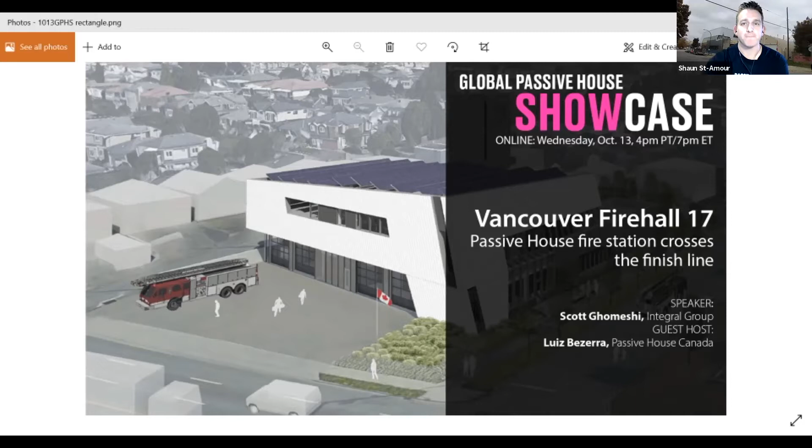For those of you who don't know me, my name is Luiz Bezerra. I'm the Manager of Education, Training, and Development with Passive House Canada. I'd like to thank the Passive House Accelerator for the invitation to be your guest host today. For those who may not know who Passive House Canada is, we're the Canadian affiliate of the Passive House Institute. Our focus is to broaden and include advocacy, education, and professional development through events and technical services. We have over 3,000 members nationwide, and we're one of the largest passive house training institutes all over the globe, with over 1,500 students in our programs just in 2021. And we now have over 200 students becoming certified passive house designers, consultants, and tradespeople. If you're interested in learning more about us, visit our website, passivehousecanada.com.

Before introducing our presenter today, I want to congratulate all of those involved here in the Vancouver Firehall number 17, and all of you here today. I wrote a few words here, guys. My English is my second language, but it's something that really touches me, and it's something I think about all the time: the changes we make today shape the future of our planet. So Harvey, that's for you, man. Let's not ask how much it costs. Let's ask how it's done. Will the decision help us moving forward and being able to save our planet? This group has the power, strength, and resilience to make necessary changes to shape a better future for our planet. This project shows, once again, anything can be achieved. And if there's will and effort, we'll get it done. Let's not reinvent the wheel. Let's make the wheel spin faster. There's a quote I like repeating to myself over and over when I'm working: alone you go faster, but together we go further.

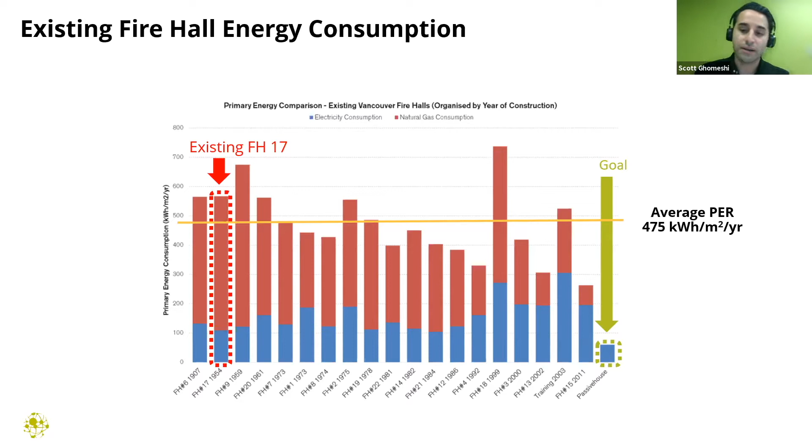With our fire hall, the existing fire hall at the time, a 1954 postmodern building, was probably one of the worst offenders, so to make the jump over into the passive house realm was practically an 80% cut. It's quite significant. We knew we had to do everything we could from the envelope perspective, and HCMA, I think, did a fantastic job of addressing that, particularly considering as tight a site as we did have to work with. But we knew that the systems and the approaches for heat recovery and system selection were going to play a large role in tying the energy narrative in and finding solutions that were going to be quite fitting for this project.

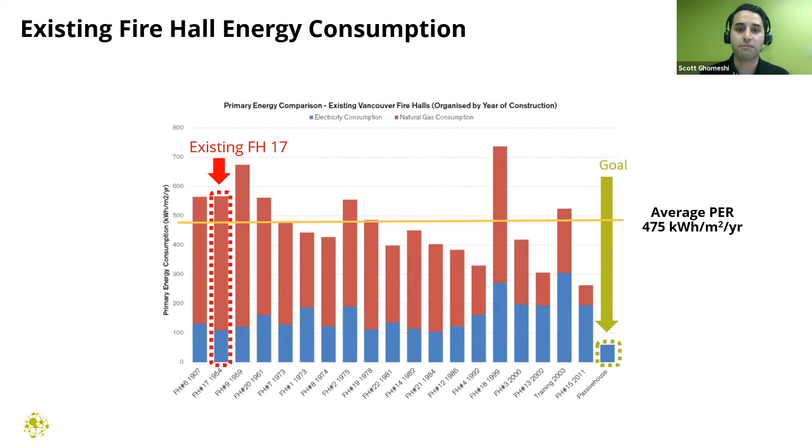The system selection started with very simple conversations with the fire department and the owners. They had some very specific requirements, which were that they needed active cooling all throughout the year, particularly because when firefighters return after a call, they're heat exhausted and need to be cooled. The spaces needed to remain cool. Average space temperatures of 20 to 25 degrees sometimes just wouldn't cut it, so they needed some spaces to be cooler than others.

Noise mitigation was also a big thing for them. I'll share a site shot on the next slide so everyone understands the context. For those who know this site well, it's off of Knight Street, a very busy thoroughfare with semi trucks rolling through at all times of day and night. Noise mitigation was key not only for firefighters to get rest, but also to be conscious of the noise the building generated for the neighbors, since the area was mostly residential, RS1, single family homes. So they had to be very conscious of that.

The city of Vancouver is probably one of the most leading edge municipalities in BC and North America, with a big emphasis on reducing carbon and pushing the envelope to reduce their own footprint. In doing so, they tasked us with looking at low carbon solutions, which right off the bat meant looking at natural gas free sources of heat, so electric based systems. These key requirements in the building essentially pointed us down the path of electric-based heating and cooling systems, which inherently lend themselves to heat pumps.

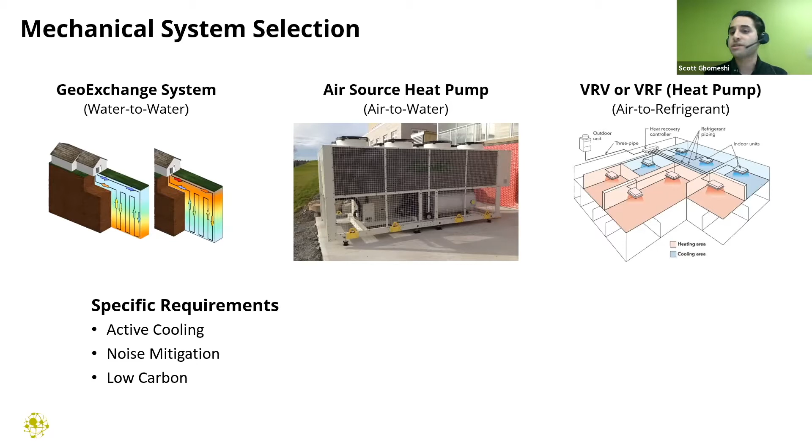Of course, you have water to water, air to water, and air to refrigerant systems. Going through the pros and cons of each of these, we eventually settled on geo-exchange, primarily for three key benefits that were looked at across the board.

For the city and particularly the stakeholders, they understood the superior energy savings that can be realized through geo-exchange. Touching on the system resiliency aspect, the big reason you have greater levels of resiliency and energy savings is because you're sharing and exchanging heat and cooling with the ground, which is a lot more constant and less disturbed compared to air to refrigerant or air to water systems, which rely on outdoor air temperatures.

It also has great noise mitigation opportunities because you no longer have big outdoor units blowing at all times of day, possibly causing a nuisance to neighbors. It also increases the service life of the equipment because everything's held indoors, nothing's being weathered over time. The maintenance people were particularly keen on that as well, since they didn't have to go up onto roofs to access equipment. Everything was indoors in a nice, thermally comfortable passive house for them to access.

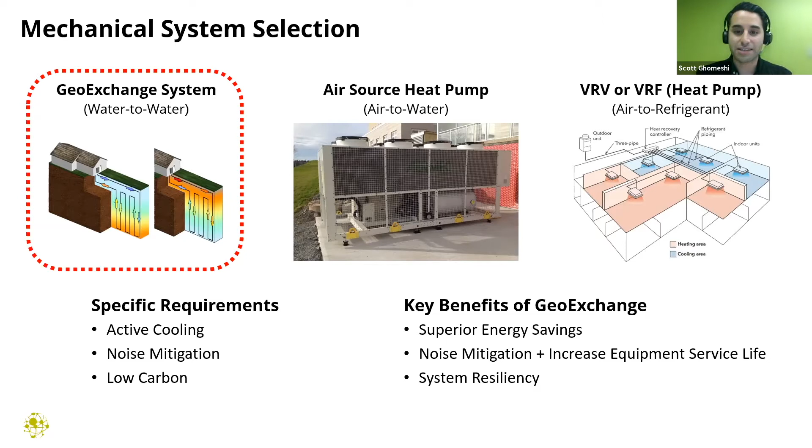A great thing about this project is the geo-exchange field required. When you consider a passive house and really reducing the loads for this building, which is just about 19,000 square feet, straddling the north and south lines of the property, with Knight Street on the diagonal on the left, we had a very narrow site to work with to actually install geo-exchange. Based on our modeling for the heating and cooling needs of this entire building throughout the year, all it took for us was just 9 boreholes.

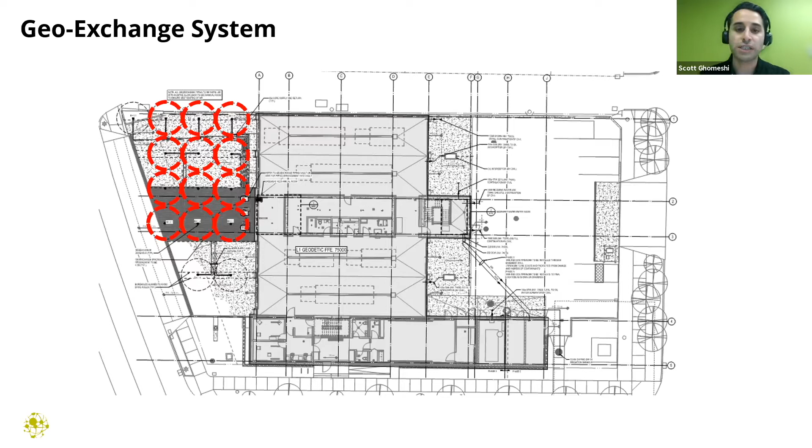And that right there is a great story. There's no backup heating in this building at all. No backup boilers, no backup cooling towers or anything. The geoexchange field, in order to meet 100% of the heating and cooling needs for this building, is just the small little portion of the site in the top left corner.

Now, it being a very tight site as it was, we definitely talked to the city, and considering that we had a little bit more room to play with, we allowed for an additional 3 boreholes for a couple of reasons. The first one is just to mitigate some of the constructability risk with as tight a site as it was, to make sure that when we're digging about 300 feet down into the ground, if we hit a boulder, we have enough room to make up for an additional borehole here and there. And so that gave us the flexibility to do so.

But it also gave us 30% more field space, which is actually kind of a big piece, particularly from the climate resiliency standpoint, because as temperatures get warmer outside, and yes, the ground is somewhat shielded from that, but your building is still experiencing that extra cooling demand. So having some additional storage in the ground to mitigate that just increases the service life of the field, which allows for this building to have a service life much greater than what it was initially forecasted for.

Most buildings are often designed for 50, maybe 80 years. This building was looking to essentially hit 100 years of service life.

Now you're probably wondering, well Scott, there's tons of room on the site, why don't you put a whole bunch of boreholes across the site? Well, that's a very good question. Anyone want to take a guess how many boreholes you'll actually need to do this building if it was a code building? Try to take a guess in the chat. Let's see who guesses this right. I'll give you a few seconds to put your number in.

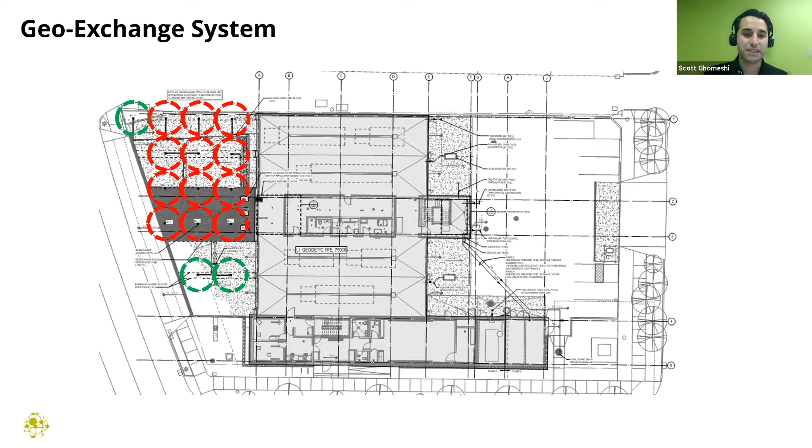People, I'm not seeing the chat move at all. So maybe everyone's... oh, I'm seeing a few come in. Okay, excellent. The correct answer for those that put something down is roughly 70 boreholes.

And you'd effectively be covering your entire site with boreholes. So in addition to the green and the red ones, you'd need the extra blue boreholes in order to make up the entire site, or to meet the heating and cooling loads 100% of the year with a building of its equivalent.

Now, the city was very clear with us. They didn't want boreholes to be drilled underneath the building itself or in lanes where trucks could be running. So that really narrowed up our field.

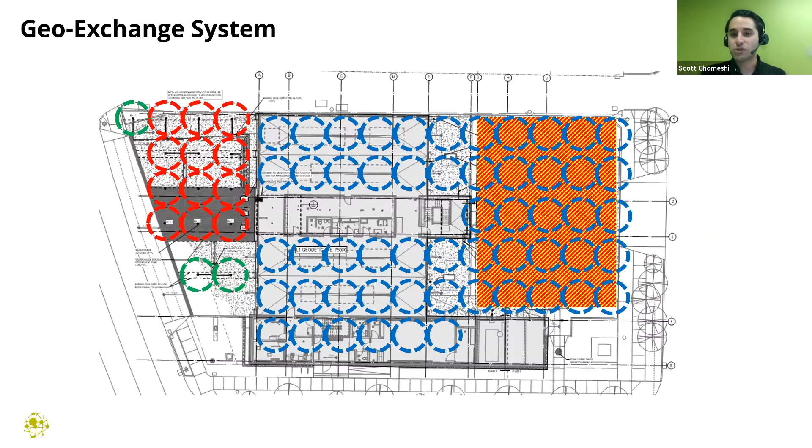And one thing I didn't share with you, which is worth highlighting, is that a portion of the site was actually actively being used for the training facility, which was put in place directly next to the fire hall, as a temporary shelter for the firefighters themselves, to remain in operation while they were building it right next door to them.

So you can see in that image that it's a tight squeeze on site, and you can see right there just the very southern edge of the building itself, straddling the property line. So we weren't kidding when we said this was a tight site. All we had was just that little sliver on the left side of the site to fit our boreholes when we looked at this entire project.

And I'm happy to report that, with some careful spec and conversations with geoexchange contractors, we were actually able to install each one of those boreholes in the exact locations that we had highlighted without any issues.

Although, there was one issue, at the very top left corner of the site, the one that's closest to that telephone pole, right at the corner edge of the site. I think the only issue they had was that they were a little worried they were too close to that telephone pole, but it turned out to be a bit of a non-issue anyway, and they were able to install it no problem.

And the nice thing about this, being such a discrete little site, is that each one of those boreholes are actually individually home run back to this one vault that's located in that bottom left corner there.

That gives us the ability such that if any one of those boreholes is compromised, we could isolate that one borehole without impacting the rest of the field. Whereas larger fields, to help save cost, normally group all the pipes together, so if one of those holes is compromised, you might see 4 or 5 go down. This gives us the ability to really minimize the downtime to the whole system.

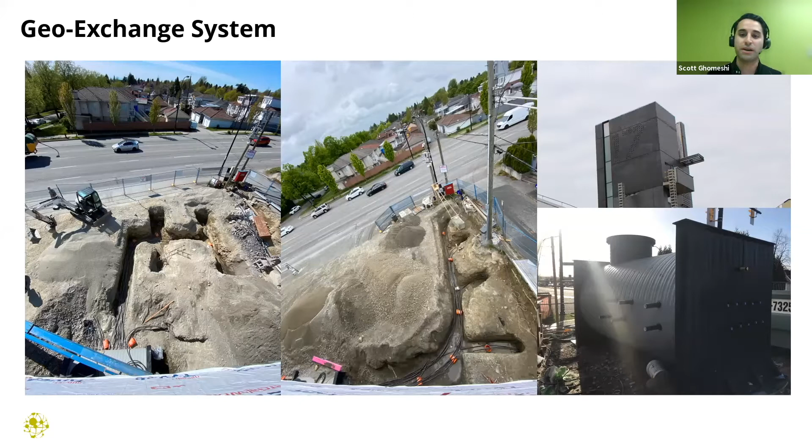Now I want to transition into a more passive element of the building that was integrated into the overall system design, and the impact it had there - the use of electrochromic glass on the building. Especially on the south end of the building, where we were straddling the south property line, fixed shading was a bit of an issue.

So we had to find ways of mitigating, particularly, the harmful gains in the summertime. If I take a step back, you could see the amount of glazing on that south facade, so we needed to be very conscious of that.

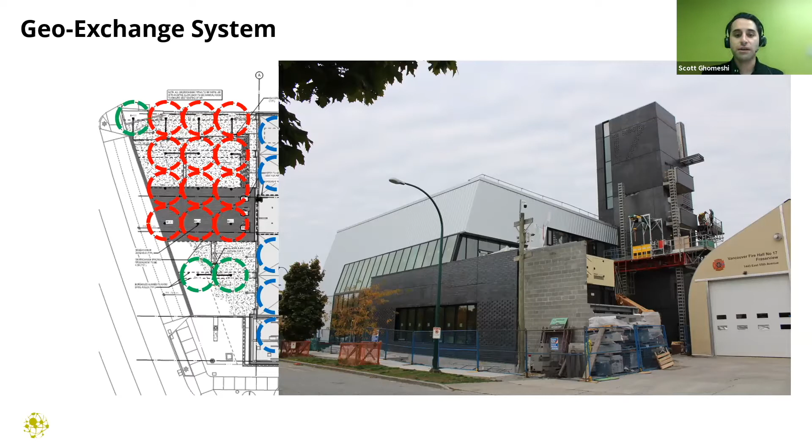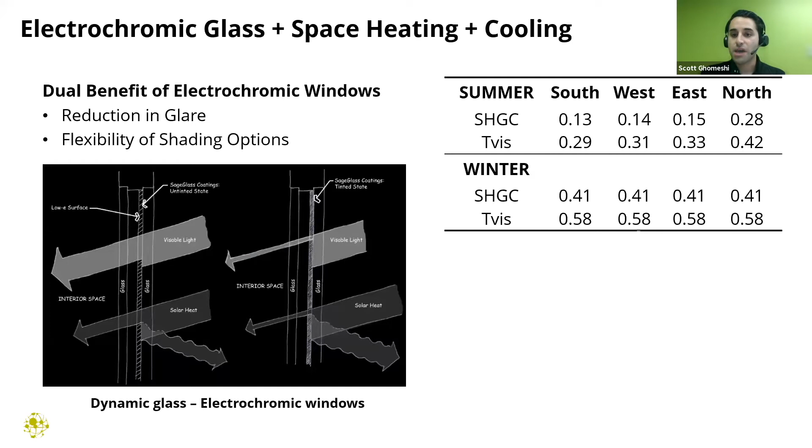Electrochromic glass gave us the flexibility to do that, but also flexibility in the shading options with its activation on and off between the winter and summer months. Between its full activation on and off, the difference is quite substantial.

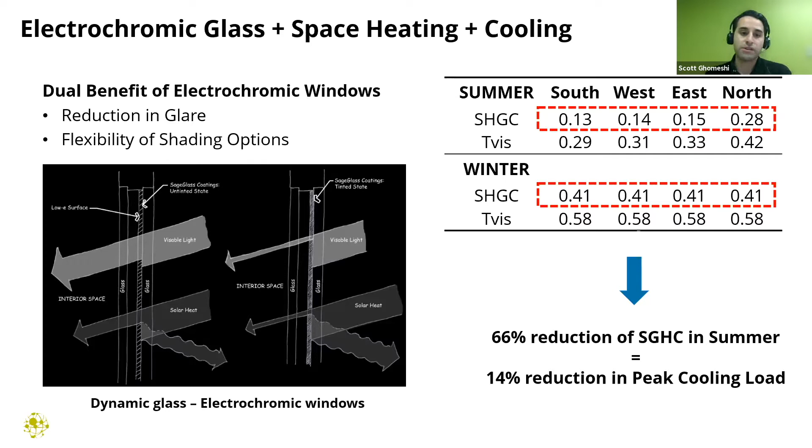It was able to shave about 14% of the load on the mechanical systems, which gave us an opportunity to put in lighter grade equipment, a bit more readily available rather than commercial or institutional grade equipment which comes in bigger sizes. So it increased our ability to find different equipment to spec, making it more cost effective. Altogether, the savings from shaving the mechanical load allowed us to pay for some of these upgrades like electrochromic glass.

The neat thing we did there - at the time, when we were in design, it was with View Glass, but ultimately Sage Glass was the successful proponent. Working with their teams, we knew this system could be integrated, since its control algorithms were very simplistic, in the sense that we could integrate them into the building control systems.

The way the system works is that the sun shines on an irradiance sensor, and based on your exposure, it then says, alright, start tinting my glass. But we layered that into the building automation system so that we could harness the ability to turn the shading on and off based on the season.

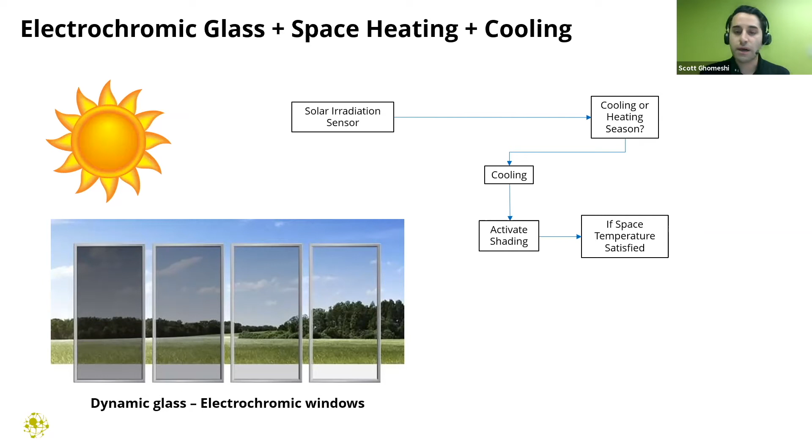Depending on whether we're in the heating or cooling season - in this case, looking at the cooling season - we'd want to first activate the shading and wait, actively allowing the system to pause before activating any other type of system. If it's able to meet the space temperature, or at least mitigate the gains such that our space temperature is satisfied, then we can sit back and relax.

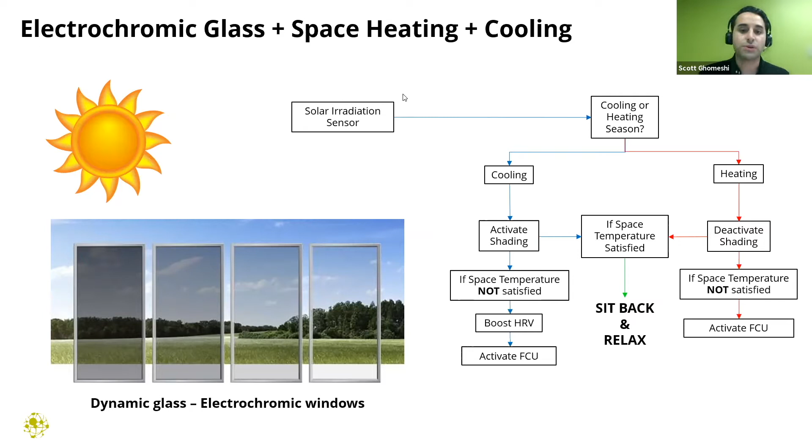It's transitioning to passive house, and more so on the ventilation side of things. The one thing worth sharing here is a high level overview to help give you an understanding of how many heat recovery ventilators we had on the project, and how they were zoned. What you'll come to realize is, wow, there's a lot of HRVs on this project. What the heck were you thinking, Scott?

I mentioned at the time that this project has been in the making for quite some time, and when we started, you'd be happy to know that Swegon was just about to enter our market.

And the only other Passive House certified component that was anywhere near this level of performance, or could offer some form of performance to us, were the Zehnder ComfoAir 350s, which really weren't tasked with being able to operate at the amount of airflows that we needed to find in a fire hall. And so we were really lucky that Swegon had brought in these units, and so we were able to design around that. But the one thing that wasn't in our advantage was that the react dampers weren't quite there.

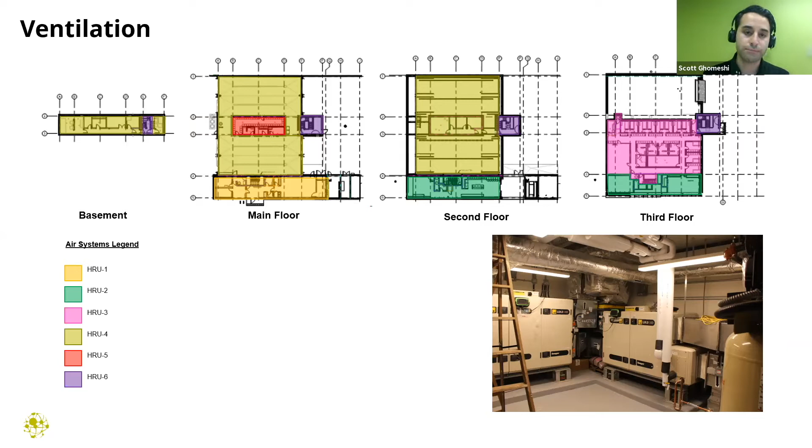And so we zoned different spaces and occupancies based on their usage and occupancy patterns, so that the whole zones could ramp up and down based on the peaks, the ebbs and flows of the occupancy throughout the space. And the one benefit there too is that we also looked at decoupling our ventilation systems from our heating and cooling systems.

So what that meant is that we ran separate ventilation ductwork from our heating and cooling equipment. So the heating and cooling equipment can recirculate and only operate when needed, whereas the ventilation systems operate all the time. And that gives us the opportunity to significantly reduce the fan energy in a lot of that heating and cooling equipment, because it's not needed to run to supplement the ventilation load to those spaces.

But, like I said, why so many units? It was largely because at the time when we were designing, we were in the midst of working through that market transformation. And it's really great to see that in the past few years we've seen other HRVs come to market, like Flakt Woods. We've seen Mitsubishi start to dabble in. Oxygen8 has units that are also available now.

Same with Ventacity. So it's great to see a wide variety of different manufacturers that have Passive House certified components that can cater to bigger projects and more complex projects and make them a reality, because otherwise it definitely becomes a bit of a challenge to design bigger buildings with just ComfoAir 350s.

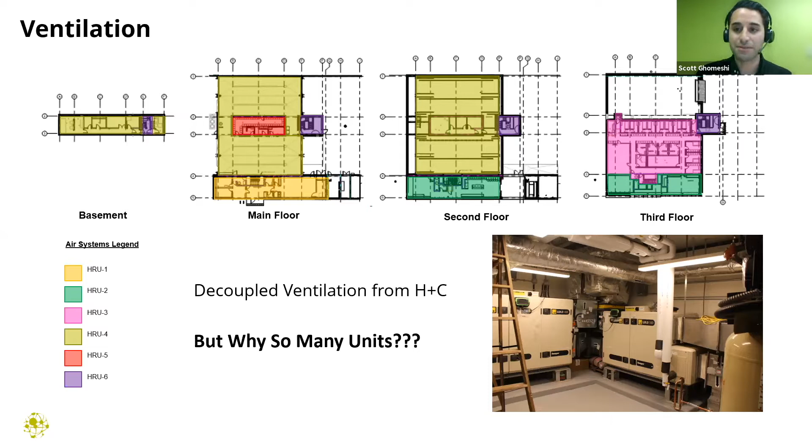And one piece of the ventilation puzzle that I definitely want to share is the topic of kitchen exhaust. Consider the fact that you've got 10 firefighters, 2 shifts, and 3 solid meals a day. In fact, that's one thing you'll probably realize walking into a fire hall: it always smells absolutely amazing in there, because there's always someone cooking and making enough food to feed the lot. So you're looking at a lot of different meals, up to 60 meals a day.

And the one thing that we learned particularly on fire halls is that you'd be surprised how many kitchen fires actually get started in fire halls. When a call comes in and someone's working that kitchen, they're going to be leaving right away. And sometimes they forget to hit the button to shut off all the equipment. So you'd be surprised how many times people answer a call, come back to their own hall, and there's a fire started and they need to deal with their own mess.

But the big story, or what I was leading to, is that they really wanted to run exhaust to the outdoors. They were not big fans of recirculating air in the space because of the amount of smoke and their previous experiences. And so they were quite adamant that this was something they couldn't shift their paradigm away from.

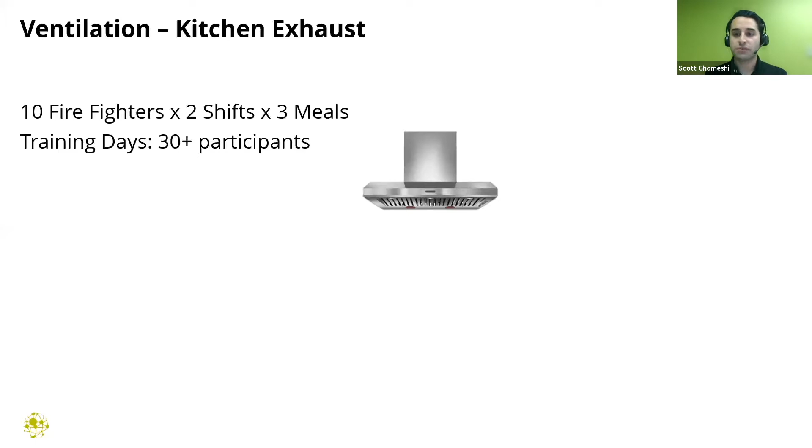And so, working with the team and knowing this information quite early, we looked at variant designs to see the impact that it had on the overall. And yes, though it had a significant impact on the heating demand, the overall impact on the primary energy was quite small in comparison. So that was just one of those decisions that as a team we decided to design around. It just meant that we had to find other ways of making up for that energy penalty.

And so we found ways of being able to balance the load, particularly on the ventilation side, such that the HRV that serves that zone can remain a little unbalanced just during those times of extended cooking. Which actually is a bit of a positive effect, because oftentimes when they're cooking over long periods of time and they're generating a lot of heat and steam in that space, if they're able to run the HRV at a bit of an imbalance and bring in a little bit cooler air, it actually provides the firefighters with a bit of relief, because they actually prefer to have the space a bit cooler anyway during cooking. So that was one way that we were able to address that.

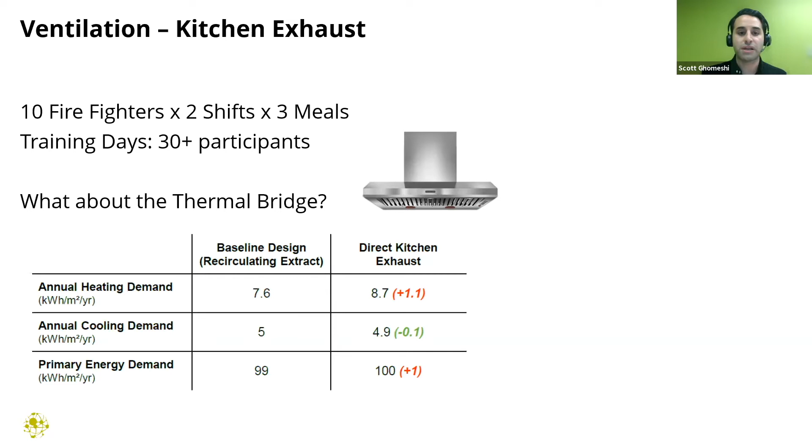And of course, with the penetration to the outdoors, thermal bridge free design, and finding ways to mitigate those as much as possible. Well, you'd be happy to know that there's tons of products that are available on the market to be able to address that. So that was one way we were able to look at finding ways to reduce that load as much as possible.

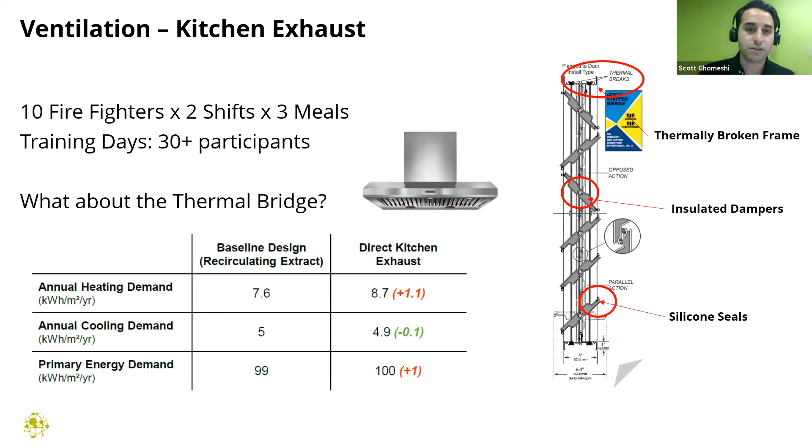And lastly, I'd like to touch on domestic hot water, because when we start reducing the envelope loads, the ventilation loads, the heating, cooling loads as much as possible, domestic hot water becomes the next elephant in the room that we need to address. And similarly, when we look at the approach that we apply from the passive house approach, this envelope first approach, it's really finding passive ways of reducing our load first before actively throwing technology at the solution.

And so here, what we started with was really just utilizing drain water heat recovery wherever we could. Very early in design, we tried to locate the showers in a location where it could facilitate the drain water to be collected in one location, so that we can then recover that waste heat and use it to temper the cold water that would then either feed up to the showers or over into a couple of tanks. And the first stage of active heating is through a couple of residential commercial grade air source heat pump, hybrid electric hot water tanks.

And I'll touch on the dual benefit of these tanks, because there was another design synergy that came from the use of these tanks. In addition to this, these tanks are great to save energy, great for storage, but they're not really great for peak loads. And in this fire hall, they're also responsible for a lot of gear washing.

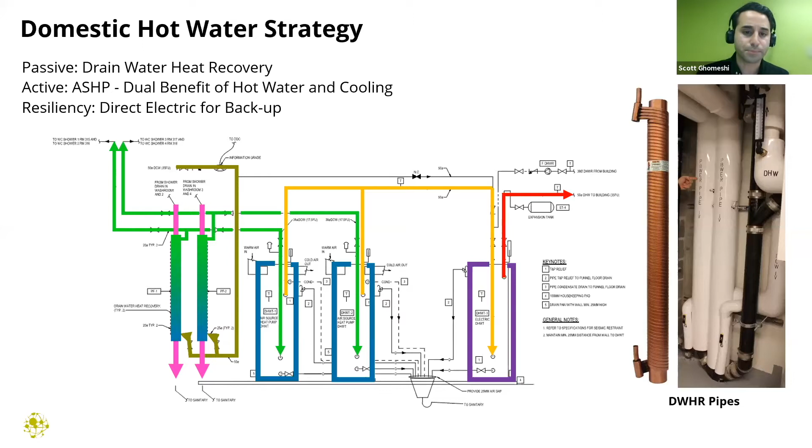This is the one benefit that I do want to highlight here with these hybrid electric heat pump tanks. If anyone's ever seen these, they're quite neat, right? It's just a little heat pump that sits on your tank. It draws warm air from your space in, it blows cold air out. And as it draws that warm air from the space in, it transfers that heat via a vapor compression cycle into the domestic hot water that's being generated, which then serves your building. Now you're thinking, well, this thing is just spewing a whole bunch of cold air,

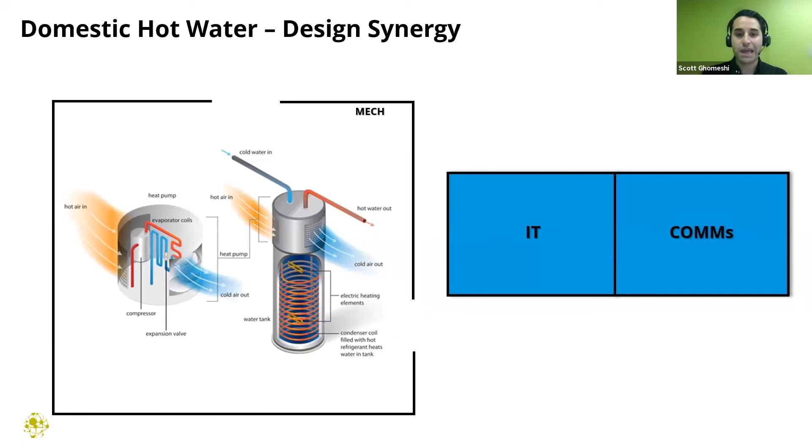finding opportunities to be able to utilize that is key. And for us, particularly in a fire hall where you've got IT and comms rooms, again, through some of the work that we did with HCMA very early in the project, co-locating these rooms where you've got cooling-only process loads that are happening 24/7 allowed us to duct that cold air into these spaces and allow that hot air to transfer back in through that space, allowing for this passive cooling effect, if you have it.

And what we were able to find, just doing some back of the hand calcs, is that based on the amount of domestic hot water consumption they're forecasting in this building, the amount of cooling that's able to offset, because of course we still need fan coils there. It's not like we're going to be utilizing domestic hot water all the time. There's always going to be fan coils there to help manage the load.

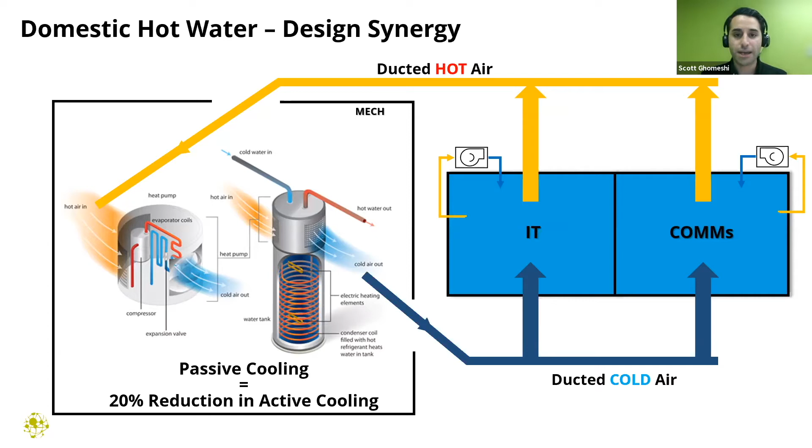But this approach would probably help reduce the amount of active cooling these spaces need by about 20%, which again is over the course of a year quite substantial, considering this is a 24/7 load which is constantly being imposed on the building. And so there you have it. Hopefully, it was a lot of information, a lot of technical information for you to kind of digest, but I'll leave it here. I'm happy to answer any questions that you might have.

So take a drink and just hold on for a second. I just gotta do some thank yous. So I just posted the questions. So there's the queue that's gonna come at you in a few moments here, Scott. So just hold on one second. We're gonna stop your sharing and I'm gonna override it.